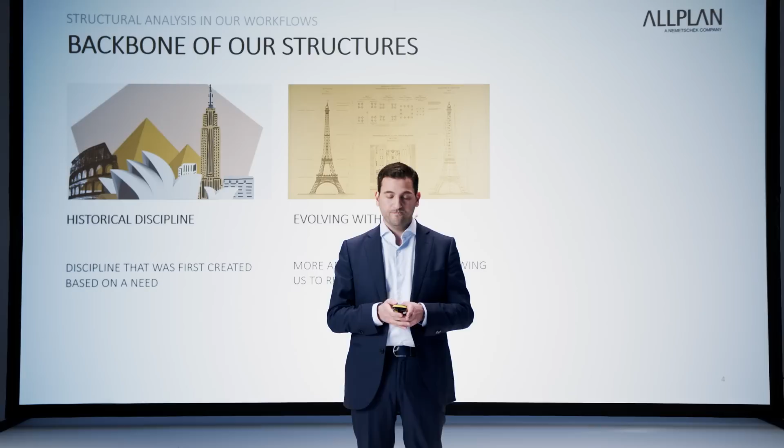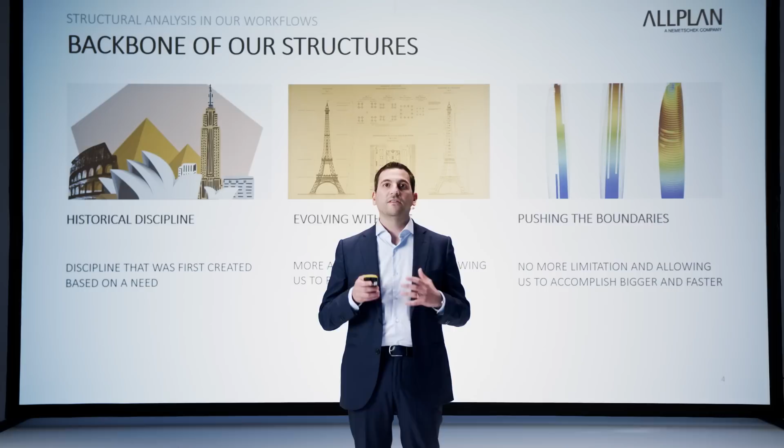Today, our capabilities are further expanded by groundbreaking technologies. Our boundaries are pushed to the limit, allowing us to dream bigger and build higher. New structural analysis solutions have advanced and are leveraging the powerful computers that we are using daily. These technologies are making it possible to make the architect's dream a reality. And just now, skyscrapers surpassing 1 kilometer are already in development. Building the impossible is now made possible.

Now, if we take a look at the big picture and try to imagine the journey that a building goes through before being constructed and used, we can identify many disciplines that are involved in the whole workflow. But is one role really more important than another? Definitely not. Every discipline plays a crucial and comprehensive role, and every discipline is essential for the building being constructed. But it actually requires constant collaboration between the different stakeholders, of course. And constantly the stakeholders need to be informed and connected.

So you might ask yourself, where do structural engineers fit in all this? And particularly, where does the analysis part fit in all this? As you have guessed, it is not one single action that happens within time, but it's an iterative process. An engineer might have an impact at a certain time, and then he might jump in again to do another iteration. Let's take a perfect example.

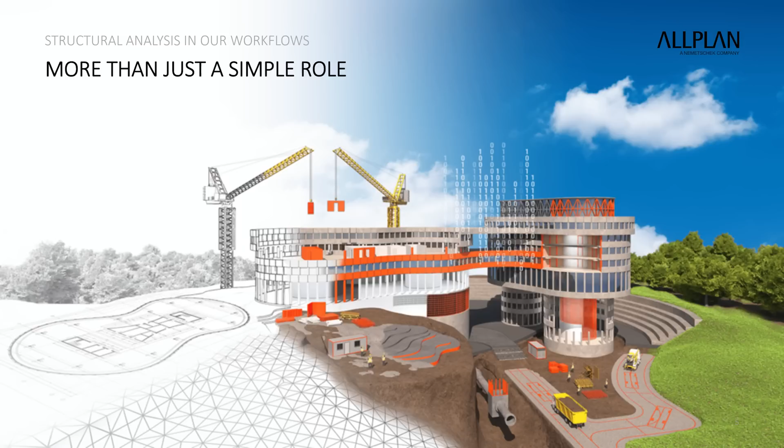The engineer will receive the drawing from the architect. He will do the analysis of the building, the complete analysis of a 3D structure in solutions like SCIA Engineer, where he will apply all his loads and see the behavior of his building.

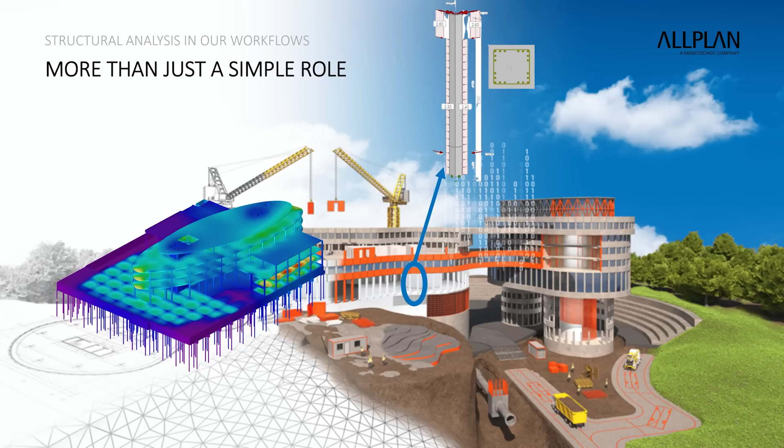He might also need to go into more depth and more detail, and that's where component-based solutions come in. He'll go select a beam, a column, or a plate, for example, to do a thorough analysis and design. And after this, of course, you have all the excavation.

So you have the foundation analysis, you have the soil mechanics, and that's a crucial part of the analysis. The engineer, as I said before, will have to go back and do certain modifications as he receives them to make sure that the design and integrity of the structure is still okay.

And this is not where the role ends. Of course, information about the design, like reinforcement or type of elements used and materials, will need to be communicated to the other stakeholders. Regardless of where you fit in the complete workflow of design to build, remember to look at it as a complete puzzle, each discipline holding an important piece of it.

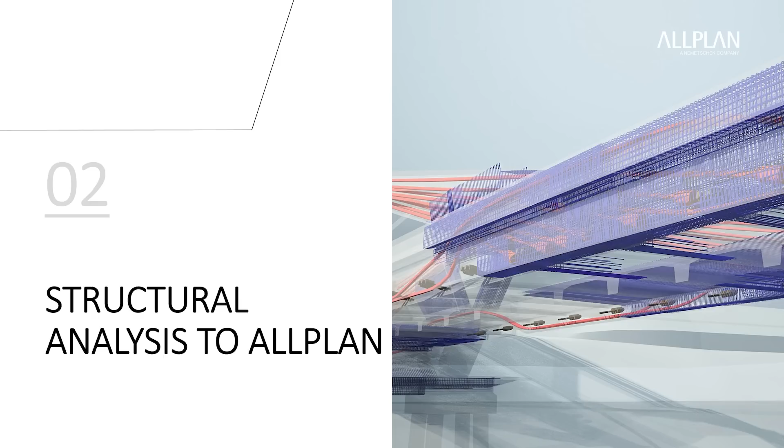So we have talked about the role of structural analysis, and I hope that I was able to highlight how crucial it is, but most importantly, how it is connected to the other disciplines and not at all isolated. With now SCIA, FRILO, and DC, three structural analysis solutions merging with ALLPLAN, it is important to highlight what this will bring to the industry, what this will bring to you.

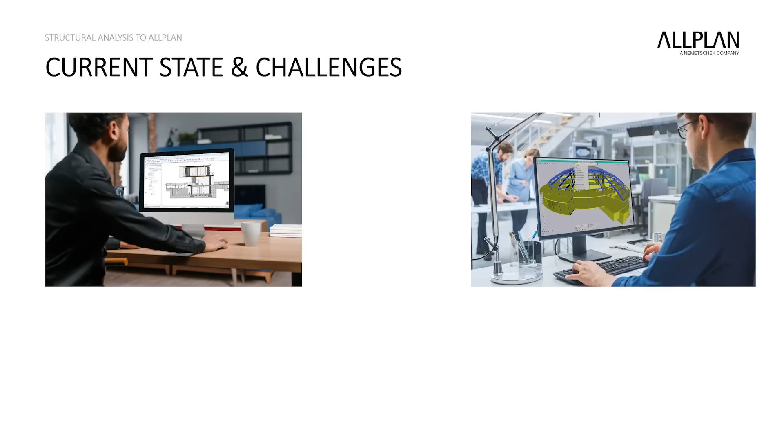What does the workflow currently look like? And where are the challenges facing us? As I mentioned previously, different disciplines are involved in the whole design to build workflow, from engineers to architects to detailers and others. But are they able to all work on one structure efficiently? And how is the information shared and communicated?

Well, we know that this information is important to be communicated. With every change, we need to provide hundreds of documents and hundreds of files. Just imagine that with each revision and each minimum change, you need to inform all the stakeholders.

Luckily, of course, many of this process is now digitalized. Okay, but did we really solve the problem? Or did we simply take the stack of drawings that we had on the desk and just put it on our desktop or in our inbox?

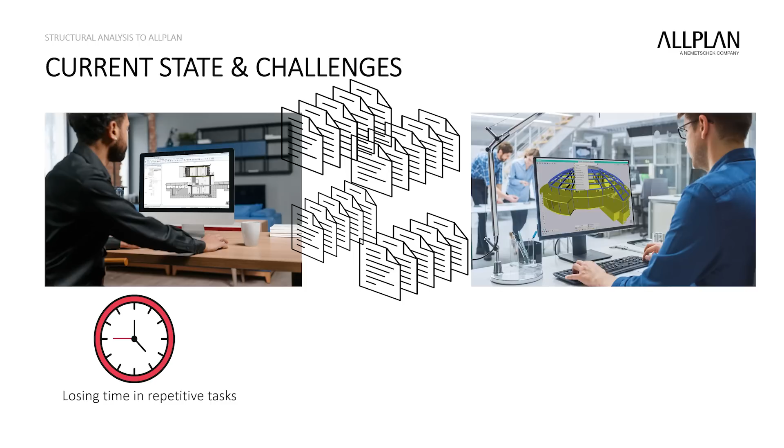With so much information being shared, we are losing time on repetitive tasks. Each engineer and architect is modeling their own structure alone. And in many cases, the model is being built over and over again, which makes it difficult to track the changes.

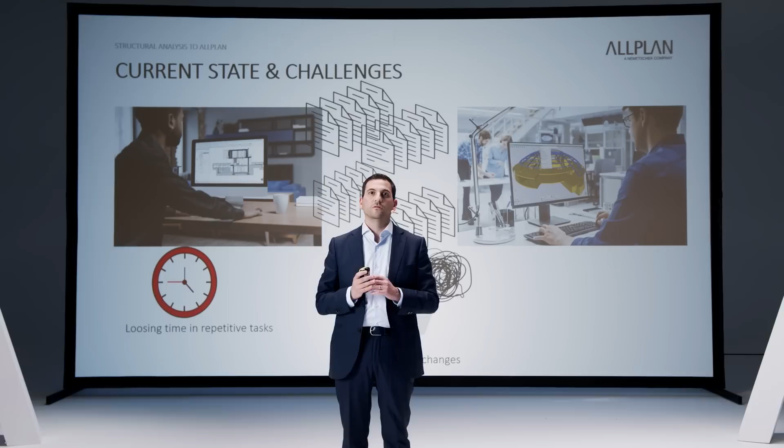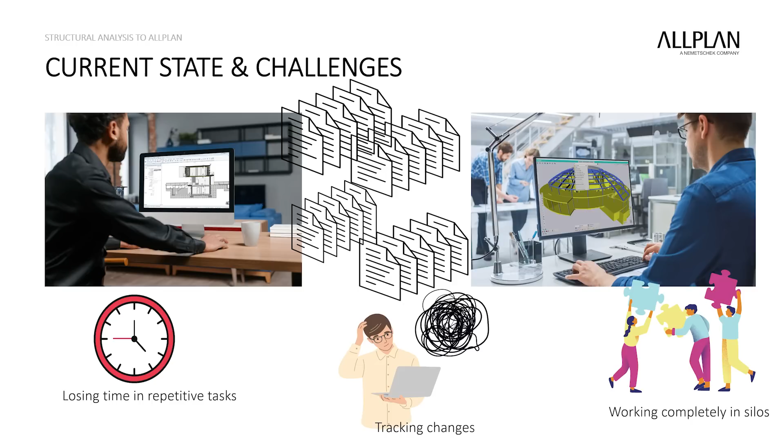We are losing a lot of time checking to see if we are working on the latest revision. And this is crucial to make sure that we are not wasting time and effort. All of this is actually due to one thing: it's working completely in silos. Each discipline is working alone, separately, each looking at their own workflow, failing to look at the big picture.

Imagine now a world where these barriers start to fall, where technology not just connects us, but really unites our workflows into a seamless, integrated process. This is not a distant dream, but now it is a reality.

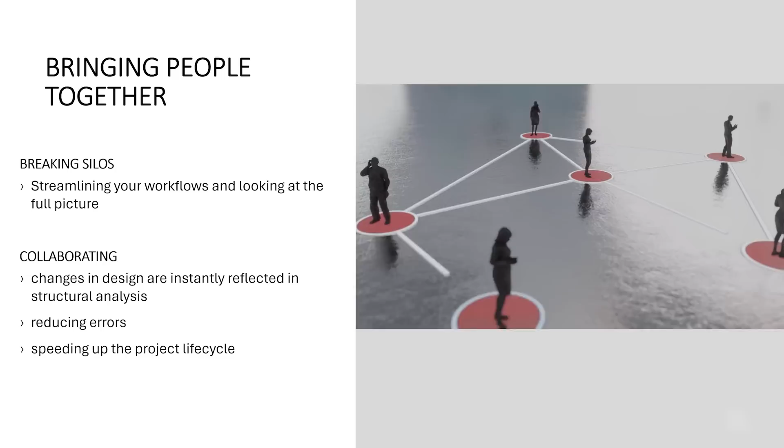With the merger of SCIA, FRILO, and DC into ALLPLAN, we are not just bringing solutions together, far more than that—we are also bringing people together. We're stepping into a time where the entire design-to-build process becomes more cohesive, efficient, and aligned, breaking down the traditional idea that each should work separately and paving the way for a more synchronized and harmonious workflow.

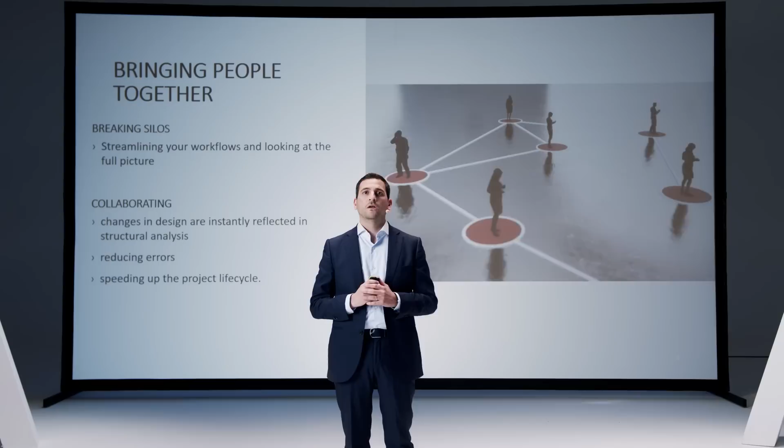Now, what does this mean? This means we can now envision more collaborative and efficient projects. Architects, engineers, and detailers can work within a unified system where changes are instantly reflected, reducing errors and speeding up the project's lifecycle. This synergy not only enhances project delivery, but also fosters innovation, allowing us to push the boundaries of what's possible in construction.

SCIA, Frilo, and DC have been part of the Nemetschek Group for years, and collaboration with ALLPLAN and other sister brands has always been ongoing. But by merging together, we are looking to go beyond just collaborating and really looking to unite our workflows, bringing you a complete solution designed to build.

Let us quickly look at what these solutions are, in case you don't know them yet. First up, SCIA Engineer. It's a versatile 3D solution that enables you to model any type of structure, from bridges to skyscrapers, across various materials, supporting many types of analysis and nonlinearities. It streamlines your workflow with its straightforward modeling capabilities and integrated engineering reports, saving you valuable time.

Next, we have Frilo, which is a large suite of solutions catering to all your engineering needs. Whether you're working with steel, concrete, timber, masonry, or any other material, or whether you have a beam, a column, a slab, or a connection, Frilo's component-based approach ensures you'll find the precise tool that you need.

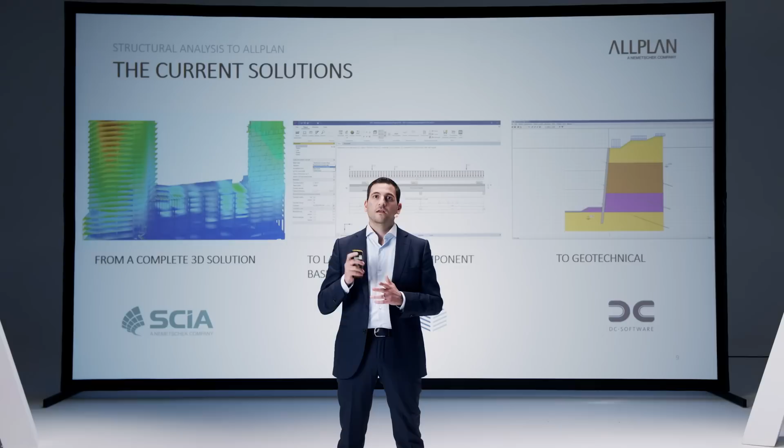And the third solution, DC-Software, offering an extensive selection of options for geotechnical and soil mechanics engineering, addressing a wide range of specialized needs in this crucial field.

Now, let us pivot our discussion towards the horizon, in an industry often perceived as traditional, not changing as fast as other industries. But we believe that currently it is starting to rapidly catch up with technological advancement.

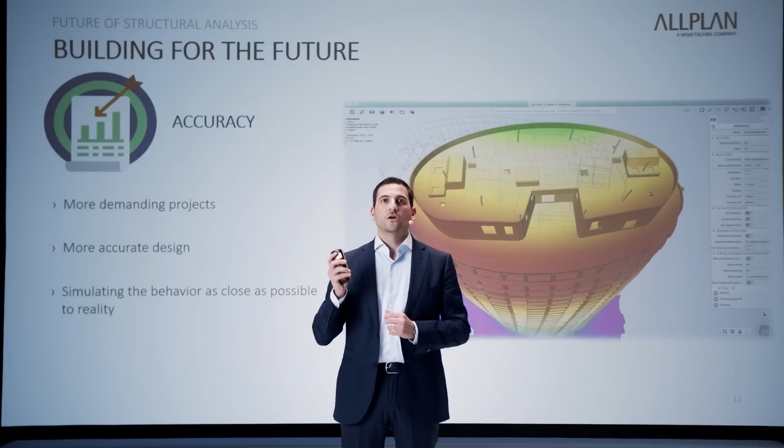What are the challenges ahead and how are we going to address them? We don't just want to build something for today. Our aim is to build something for the future. And in our journey towards building for the future, the first cornerstone we have is accuracy.

The complexity of modern projects, having a large number of variables and inputs, dictates the need for more and more precise analysis to be performed. With the demand of economical design rising as well, fast and quick assumptions are to be avoided.

Our second cornerstone in order to build for the future is, without a doubt, safety. We have seen in the last years the increasing numbers of natural disasters, from floods and hurricanes to earthquakes, due to global warming. These events have shed light on the need for more and more resilient buildings and infrastructures.

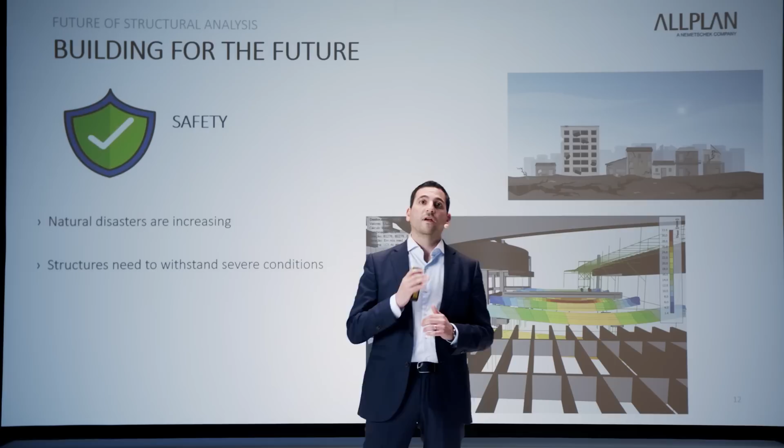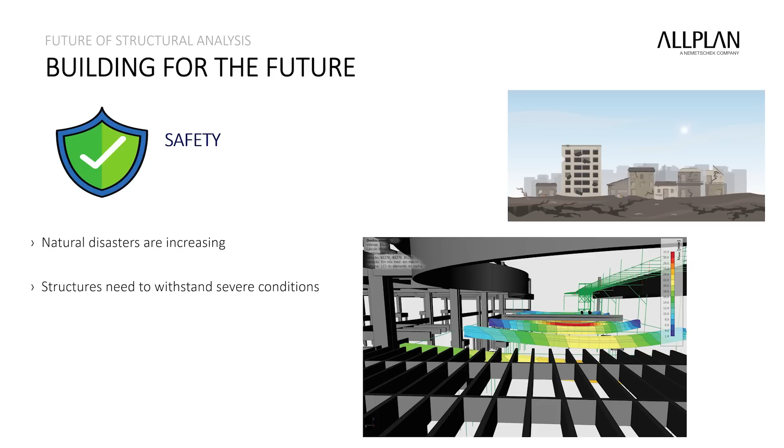These events are not just warnings, but calls to action for every architect and engineer out there. Building for the future means building structures that are safe at all times and can withstand these severe conditions. Our design must be safer than ever, ensuring that when the storm passes or if an earthquake hits, our structures remain safe, a testament to our dedication to protecting lives.

But how exactly do we achieve these essential cornerstones, accuracy and safety? They really go hand in hand. And the answer lies in leveraging technological advancement in analysis, like our solutions, enabling us to model and predict structural behavior of our building.

For example, being able to simulate the impact of a severe wind load on a structure will allow us to accurately see the impact of a hurricane that hits the structure, and it will help us ensure that our buildings are designed to resist such a force.

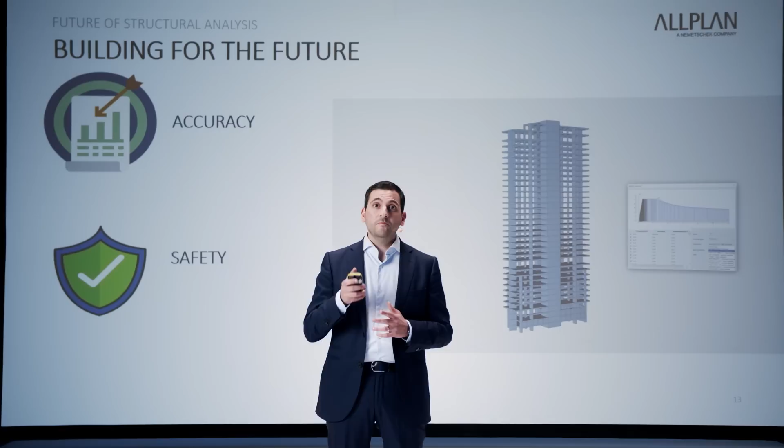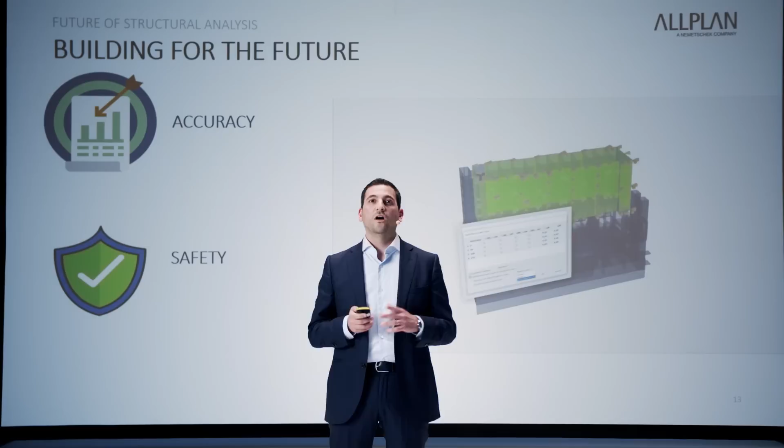Time is another critical factor. But why is that? Because it has an impact on our construction materials, like concrete. By taking account of time, we are able to consider cracks, creep, and shrinkage, which will lead to a reduction of performance in concrete. Of course, many other types of analysis are also important to be performed, like seismic analysis.

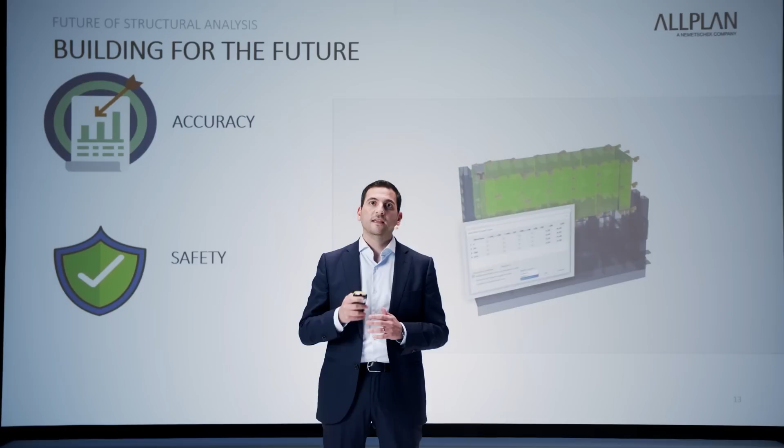In order to see the response of a building during an earthquake, and to be able to design our structures that are safe. Taking into account the different stages in construction is also very important. And of course, many other types of analysis and nonlinearities also need to be taken into account.

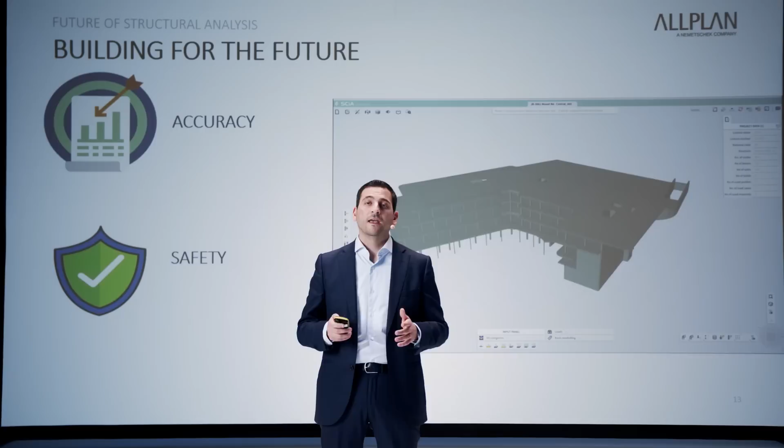Accuracy and safety are also dictated by codes and standards in different countries. And in the coming years, we are going to see a new generation of Eurocode that will be published and that will replace the existing one. In these standards, the latest research and findings are included, making sure that our designs are safer than ever.

How can we build for the future if we don't talk about sustainability? Sustainability will play a major role in the industry in the coming years. And it is not a surprise if we look at the stats.

The construction industry is responsible for approximately 39% of the global CO2 emission. This includes emissions from the production of building materials, construction process, and the operational emissions of buildings.

Construction and demolition activities contribute to a significant portion of waste worldwide. In Europe, this is estimated to be 35% of the total waste that is generated, and 50% of all extracted materials end up in the construction industry as well. These figures underscore the urgent need for sustainable practices.

It's a call to action for all of us in the industry to innovate and implement solutions that reduce our environmental footprint. So, what does it mean for us, and how does structural analysis fit in all that?

The area of construction materials is witnessing a rapid evolution, opening the door to innovative and cleaner alternatives to our standard construction material. We already saw new resin-based materials that could potentially replace traditional rebars in concrete, and many other promising initiatives. Furthermore, the adoption of green concrete and timber is also on the rise.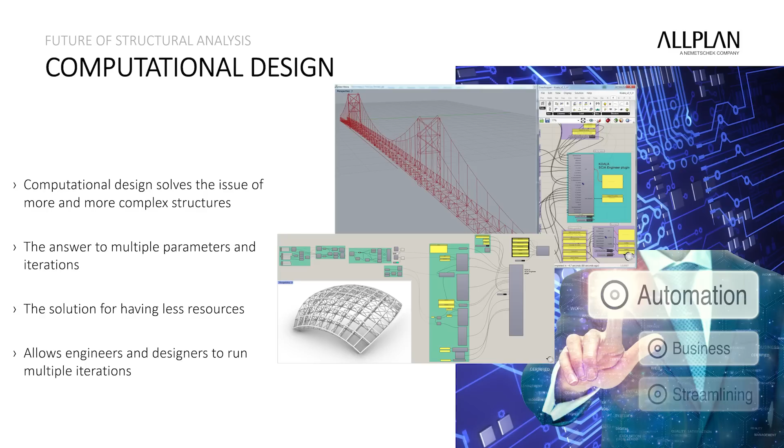To put it simply, it's a graphical parameterization, a graphical sketch with different inputs and parameters like you see behind me on the screen. These scripts translate into having our complete model drawn, like we see in the pictures behind me. And what's particular is that it's much easier than asking an engineer to code, and the learning curve is much faster since it's really graphical parameterization.

Our structures, as I said before, are more and more complex with a lot of variables, a lot of different inputs, from the design to checking carbon emissions to prices. Many factors come into play when looking at the best and optimal design. This is where computational design comes in, enabling us to check multiple solutions and iterations in order to find the best design that answers all these criteria.

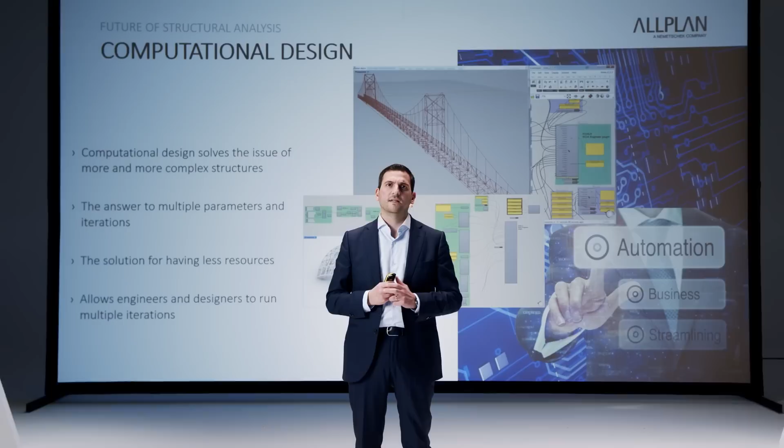With resources and time and engineers less and less available, computational design will allow us to save enormous time and a lot of tedious work. It's impossible to overlook the transformative power of artificial intelligence and machine learning. Over the past years, we've seen these technologies redefine possibilities across various industries. To imagine the construction sector remaining untouched is frankly a denial.

AI and machine learning are not just buzzwords. They are essential tools in the evolution of structural engineering and analysis. By harnessing these technologies, we can predict structural behaviors with unprecedented accuracy, optimize materials and design for both efficiency and sustainability, and foresee potential future failures before they even happen.

Just imagine artificial intelligence and computational design being used together. Now let me quickly address a taboo: this will not replace engineers or architects, but it will allow them to really make better and faster informed decisions.

With the fourth industrial revolution and its advancement from mechanization to digital interconnectivity, Construction 4.0 is identified as the next major revolution in our industry. This new era will be characterized by the fusion of digital and physical worlds, where connectivity will enhance our traditional construction methodologies, revolutionizing also our fabrication processes thanks to automated machinery and robotics.

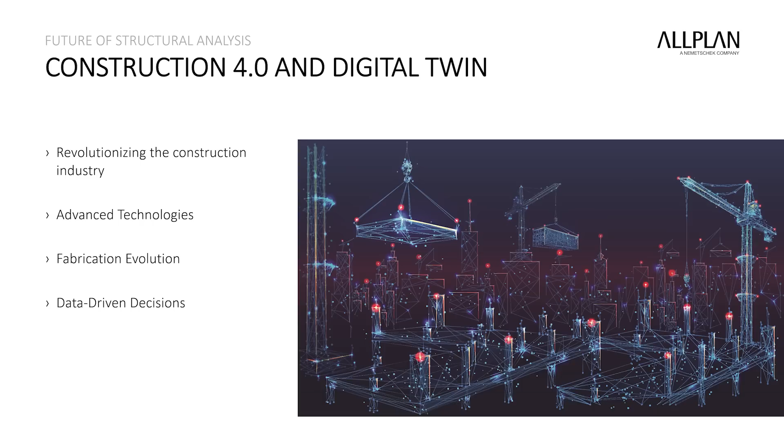Let me illustrate it with an example. Imagine a structural engineer who connects to a digital twin of the building or structure he's working on. He can immediately track all the changes happening on site thanks to monitoring equipment already there, and he can even see the impact of wind on the construction site.

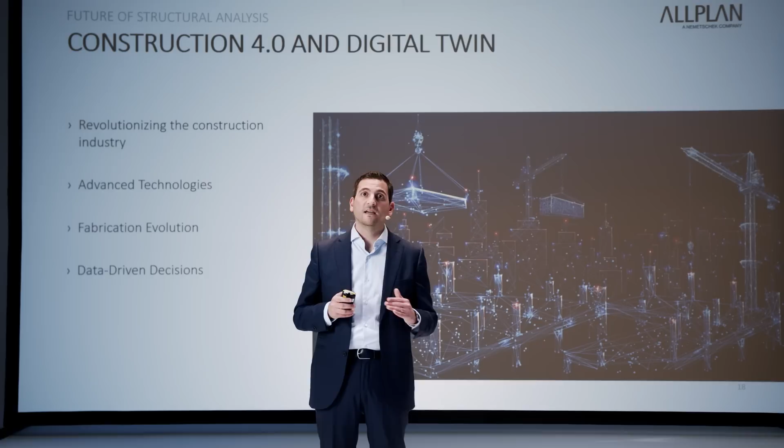Thanks to all these sensors and information, he can now reassess the integrity of the building. Once the design is finalized, the fabricators are instantly informed and can track the changes as well. Based on that information, he can calculate the integrity of the structure, and with the design finalized, the fabricators are instantly informed with one click.

The role of structural engineers in all this is more and more critical. With the power of digital twins, the Internet of Things, and data at our fingertips, we stand on the edge of revolutionizing how buildings are designed, constructed, and maintained. But beyond technology, it's the collaborative spirit, the shared vision of excellence and sustainability, and the relentless pursuit of innovation that will drive us forward.